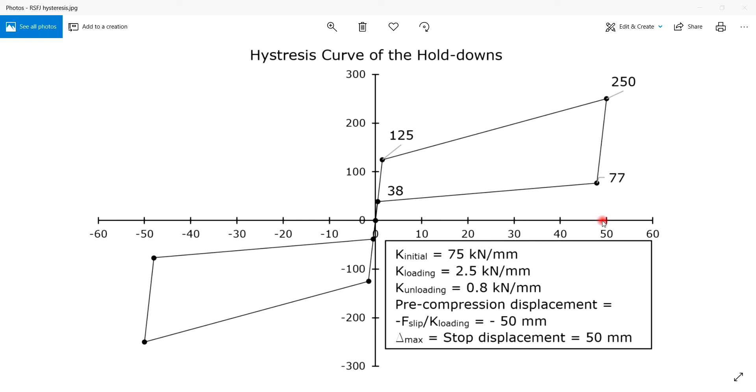You can see two notches at the corners of the wall that are removed to make a space for the dampers. The dimension of the dampers will determine the dimension of the notches. For this case, 400 millimeters by 600 millimeters is considered for this wall. The thickness of the wall is 200 millimeters and it's a reinforced concrete shear wall.

The first step is to define the link element that represents the energy dissipation devices. We're going to name the link RSFJ, standing for resilient slip friction joint. The link type that we need to use is damper friction spring. This type of link element is capable of modeling a flag-shaped load deformation response.

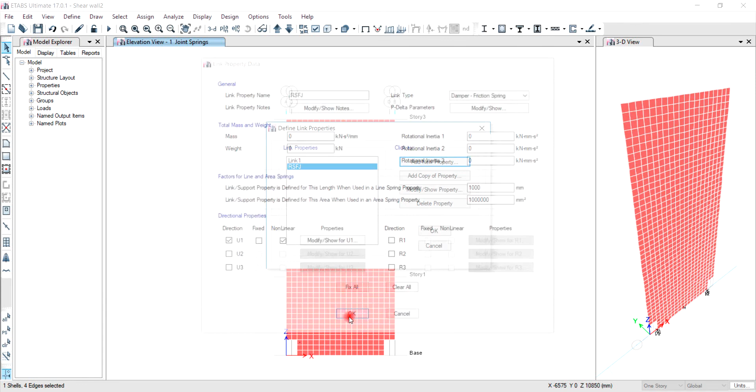The next step is to define another link to represent the foundation level. We're going to name the link the foundation. The link type we're going to use is gap. Similarly, we are looking at the U1 direction and nonlinear properties because our analysis as a whole is nonlinear.

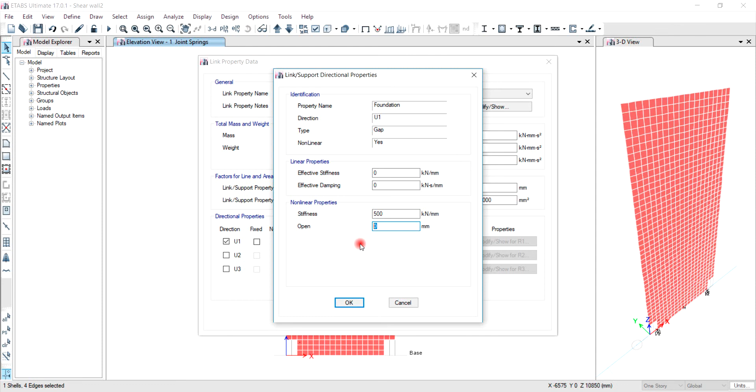In the nonlinear property section, the stiffness, we're going to put a large number, which in fact is the stiffness of the foundation. And we're going to leave this value as 0 because the link should not open, or in other words, the wall cannot go into the foundation at the time of the rocking.

Now we're going to draw the links. The properties are RSFJ. One hold down and the other one. Here we're going to set and assign the boundary condition for the bottom of the links as simply supported.

Also, we're going to define a point as the shear key. So a shear key for rocking walls should be able to transfer the forces from the wall to the foundation, but should be able to uplift during the rocking motion. So we're going to free the translational degree of freedom in the Z direction.

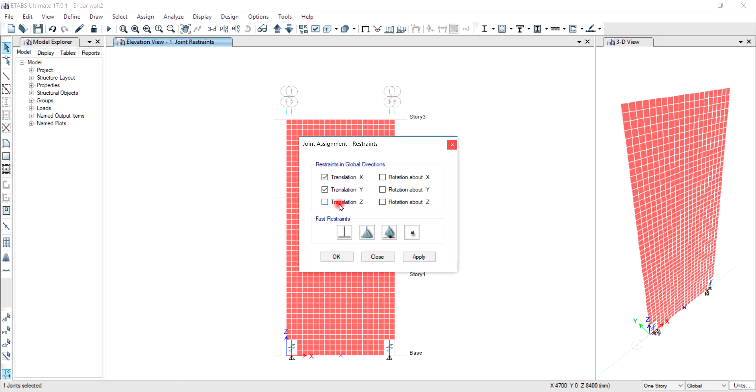The next step is to define a joint spring for rocking toe. So the point spring property, we're going to name it the rocking toe, representing the point that the wall would bear on the foundation. And we're going to use the foundation link element that we've defined before in the plus Z direction.

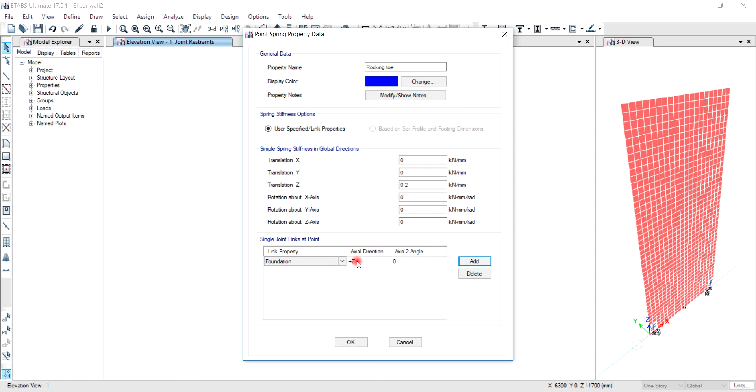Here we're going to assign that point spring that we defined as the rocking toe.

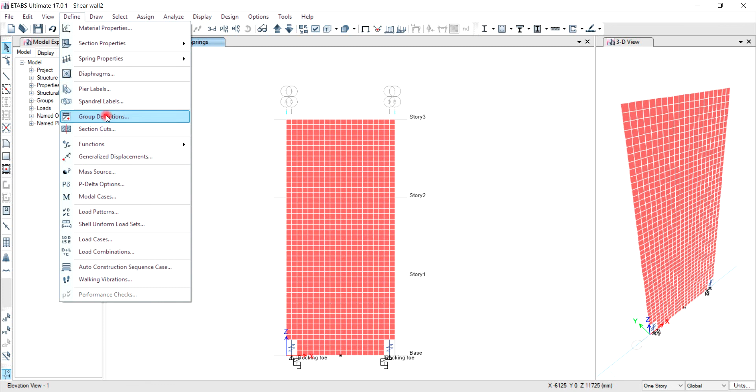Now we have modeled the walls, and the next step would be defining the load cases. Before we go for the load cases, note that we have already defined a generalized displacement property representing the top displacement of the wall, like the horizontal displacement of the wall at the top, so U1 direction.

The load cases that are defined, first one is the pushover loading. The load case type in use is nonlinear static, given that our links are all nonlinear, so all of our load cases should be nonlinear. Even if you're doing time history analysis, it should be nonlinear time history analysis. We are using the acceleration load vector at the UX direction.

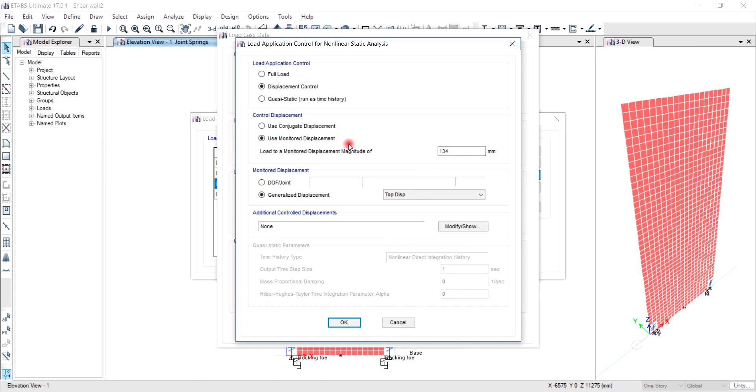The load application is defined as displacement control here because we are looking for limiting the drift to 1.5%. So the load case will push the system at the top. So the generalized displacement that we have defined earlier is used here to 134 millimeters, corresponding to 1.5% drift at top. So we call this load case pushover loading, which shows the wall in loading.

There is another nonlinear static pushover load case defined, known as pushover unloading, which unloads the wall. This load case, which again is nonlinear static, starts at the end of the pushover loading load case. Means that the wall will be pushed to its 1.5% drift at top and will be pushed back to its original position. Note that the direction of the acceleration vector is the opposite here.

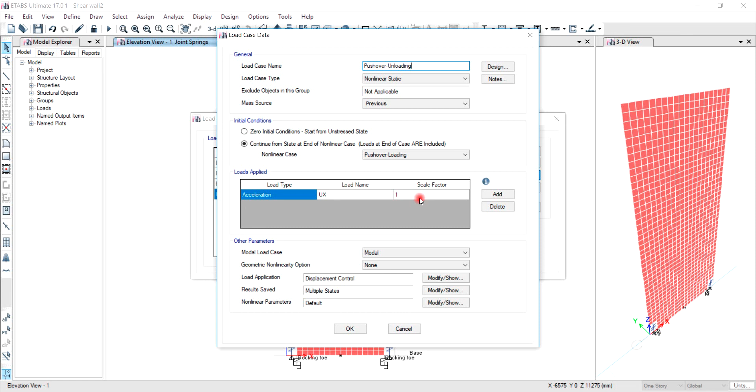Now we run the analysis. Given that we have meshed the wall and the load cases are nonlinear, the analysis would take longer time compared to linear static load cases, and more resources are required.

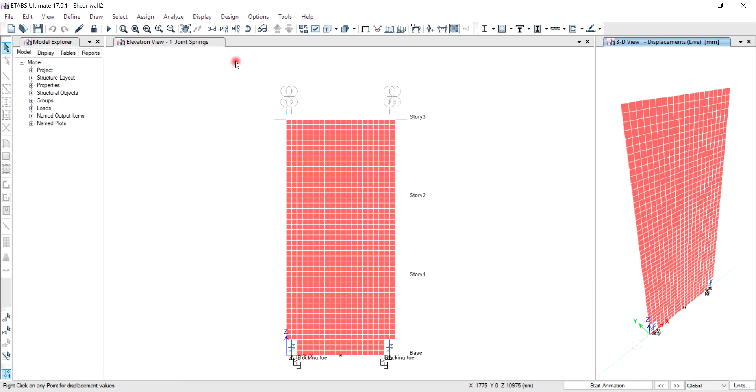First, we're going to look at the deformed shape of the wall. So in the pushover loading case, we are looking at the last step of the pushover. So this is the deformed shape of the wall. As you can see, the wall went to 1.5% drift. This link, which is in tension, is fully open. And the one in compression just went down by 3.3 millimeters.

This is the shear key. As you can see, it decouples the vertical movement of the wall and has moved by 23.3 millimeters upward. Defining a proper shear key is very important for rocking shear walls.

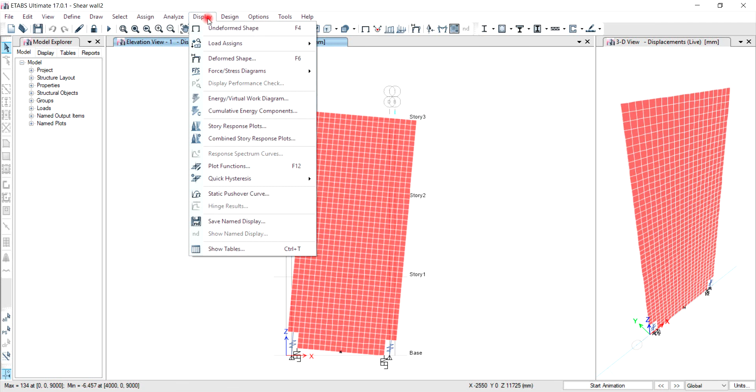Now let's have a look at the hysteresis of the joints. So in the display menu you can select quick hysteresis. That will show you the load deformation behavior of the links. This is the load deformation behavior of the link element in tension. A perfectly bilinear relationship. And this one is for the one in compression, which, as can be seen, is opened only by 3.3 millimeters.